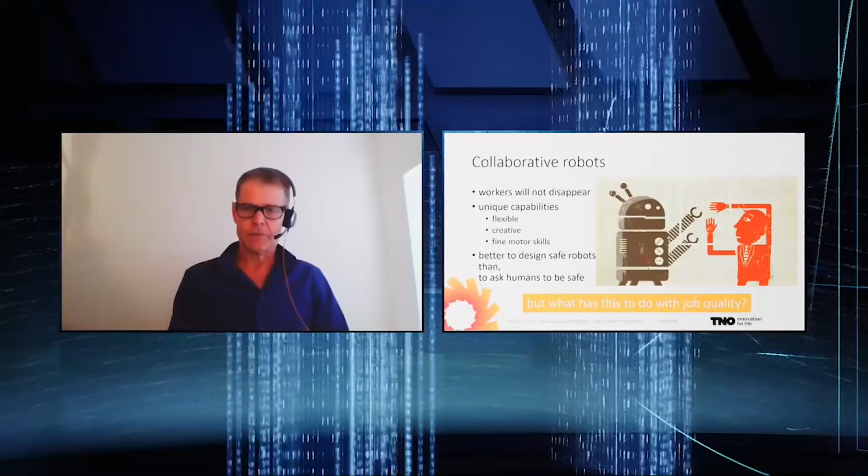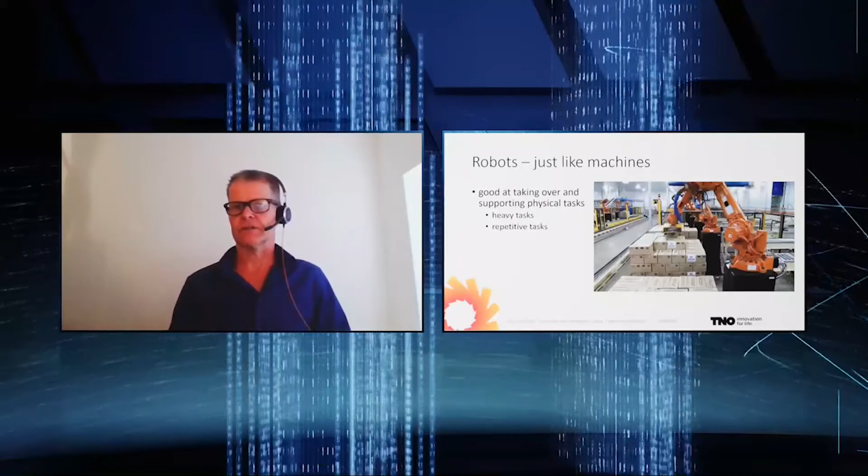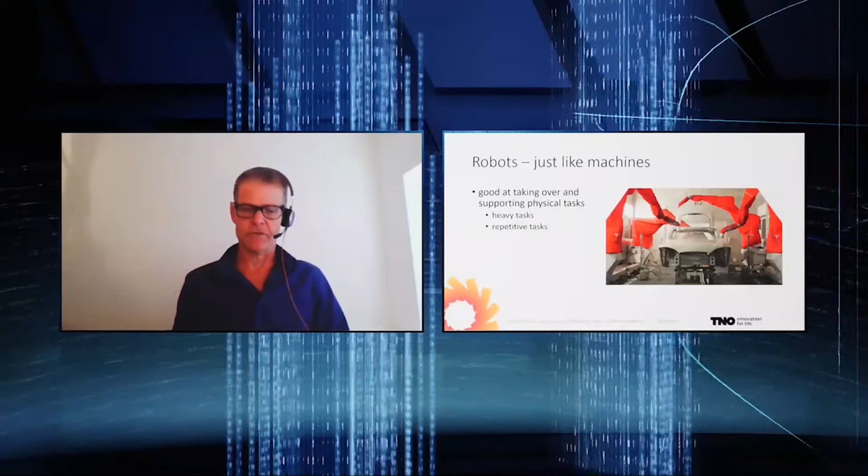Robots are very good, just like machines always were, at taking over and supporting physical tasks, heavy tasks, repetitive tasks. Like this, for instance, the palletizing robot. But these are unsafe, like a spray painting robot - also still unsafe, but very good at taking over these tedious tasks from human beings, and that gives a lot of problems as well. These are the first collaborative robots.

This orange thing is a mobile robot that basically brings the goods to me, so I don't have to pick them up. I don't have any heavy push and pull forces. So that's positive, and it helps productivity enormously because I don't have to walk through all the aisles anymore.

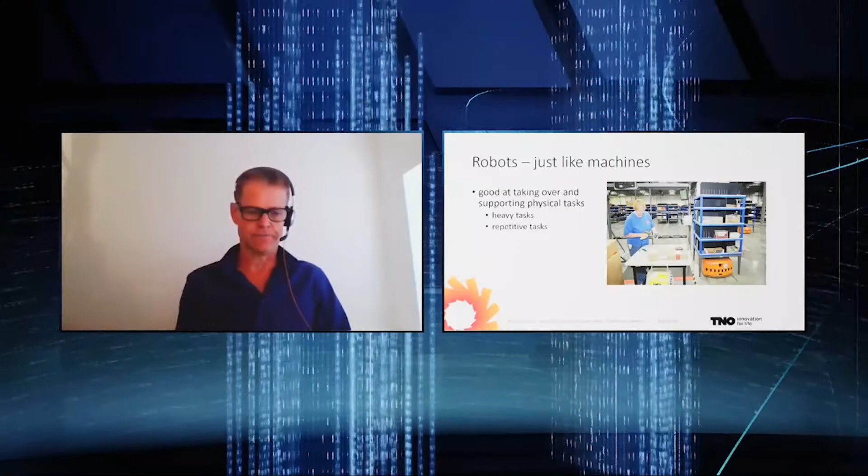And this is a very new breed of collaborative robots. They're closer than this you cannot get, because you wear the collaborative robot and it supports my back when I have to lift heavy stuff. They're coming to us, these exoskeletons. That's what we research as well, by the way.

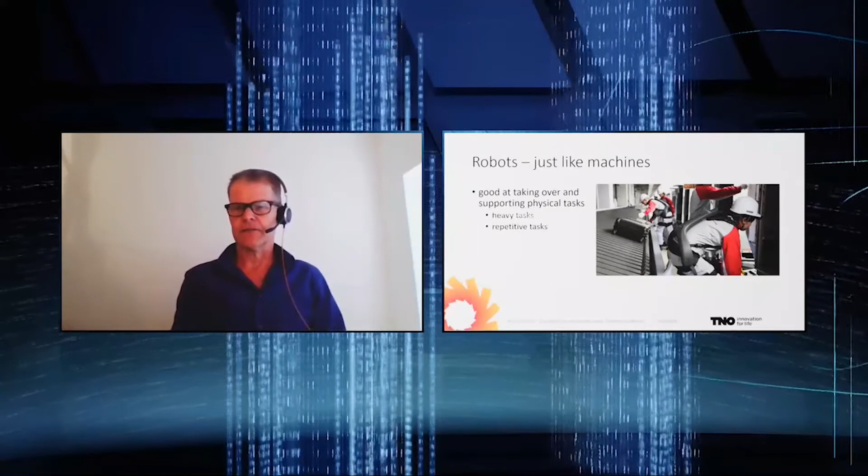So with all these technical innovations, these technical solutions, what you would think is that the effect on physical load and the physical load problems would be improved.

Unfortunately, these improvements have not yet happened. So we still have tiring and painful positions. 2005, 2015, no difference. The same for the other loads, repetitive hand and arm movements - it's exactly the same.

So my point is, how come we don't have these results with all this technology? Well, first of all, if you buy a robot, don't expect the robot to make the working conditions better, because the robot cannot do anything. And more importantly, it's not the robot that is designing the work.

Engineers are designing the work, and they may not always pay attention to things like job quality, and that cannot be expected. Research has shown that obviously managers aim at productivity improvements, and they're willing to include job quality as long as it doesn't reduce productivity. Now, how do you do that?

Well, that's my discipline. What my discipline is about - ergonomics.

Ergonomists try to achieve both productivity and job quality. Something about system optimization, that's what we call it. Technicians tend to focus on the technical system that should be optimized, and that can be a challenge in itself. What we do is we want people to optimize the system as worker and technology.

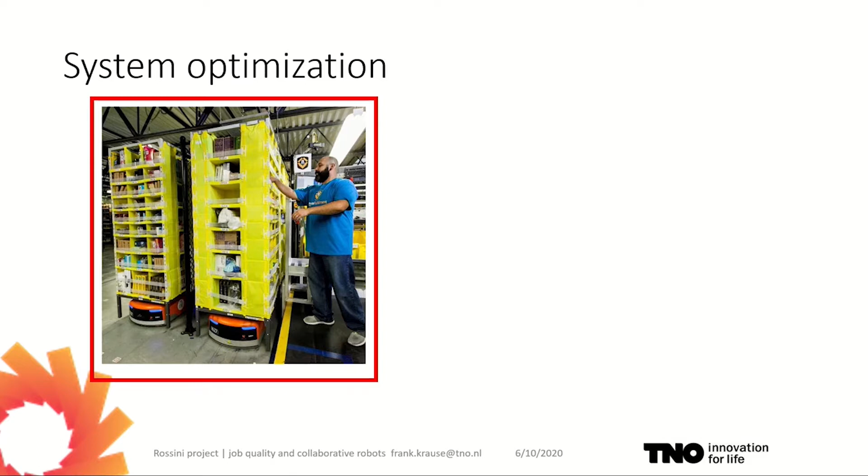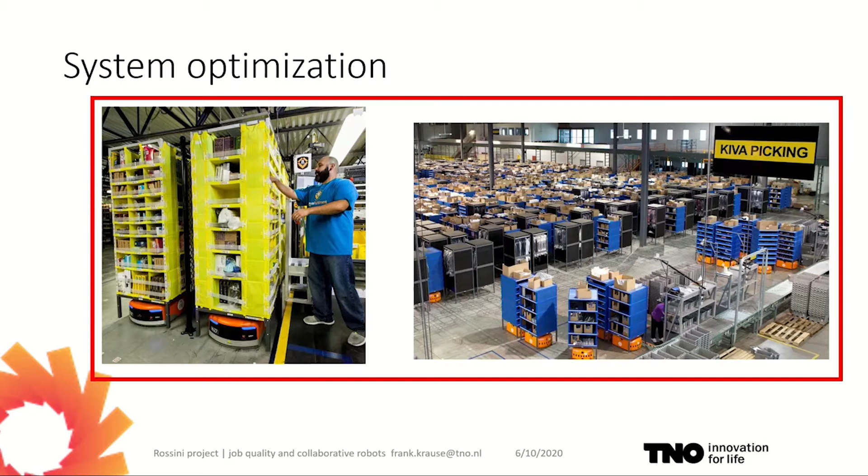This is the system you should try to optimize, and even take one step further. We want you to optimize the full system, so worker, technology, and organization all together, because that way you will create an optimal system. By the way, this is called ergonomics, and you will create what we call sustainable productivity. So not just short-term productivity where you take advantage basically of the human being, but it's sustainable, and that works best according to what we think.

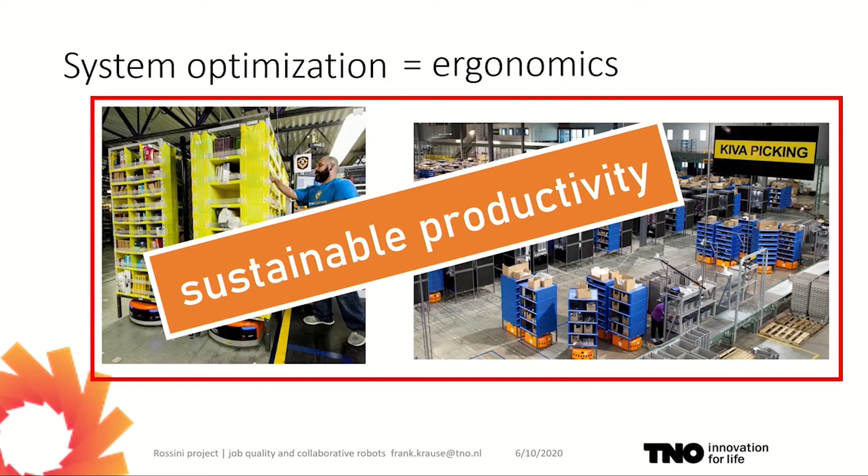Now, how do we treat job quality in the Rossini project? There are two ways. First of all, in the design of the cobot, in the design of the robot. And it's all about communication design, because with communication design you can achieve a lot.

First of all, what you can achieve is safety, because if I know what the robot's going to do, if the robot knows what I'm going to do, then we have a safer situation. The same goes for efficiency. If I know what the robot's going to do, I don't have to wait for the robot. If I think the robot's going to do something and it isn't doing that, then I have a problem.

Same goes for trust and social aspects. If I have a robot and I feel, well, this is a mate in this robot, then it helps me with my job quality. And this is another very important aspect.

It's also called autonomy. That's what we all want. We want autonomy, and we want to keep control. So we don't want the robot having control. And this is all also about communication. So that's the design part of the robot, the inherently safe robot.

We're also involved in another way, and that's in task design and task management. We created, it's still in the prototype phase, a design tool that helps the engineer to design the collaboration between human and robot, and not just this collaboration, but also take into account the tasks the operator is doing when he's not collaborating with a robot, because it's always that you're working together with a robot, but you're also doing other stuff. This design tool helps you to do that.